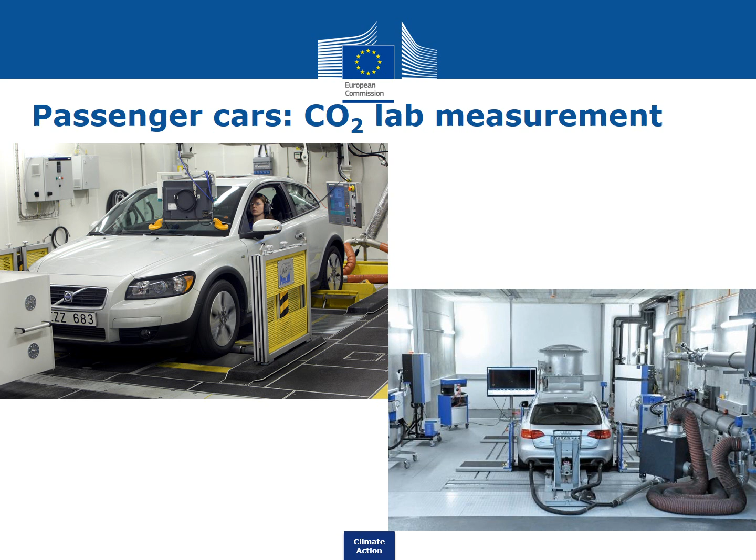And this is mainly because, for example, you can have a low, a medium, a high, a long, a short cab, or any other type of cab. You can also have 2, 3, 4, 5, or even 6 axles with different configurations like 4x2, 4x4, 6x2, etc. You can also have different tires for each axle, which means that you can have single tires or twin tires for each of these axles.

This is something very important. The same engine can be used on, let's say, different vehicles, and the same engine can be fitted also with different gearboxes or with different axles. So that means another configuration again. Then, the truck can be a rigid, can be a semi-trailer, can be a tractor, or if you are talking about buses, then this can be a coach, can be a bus, or can be even a city bus.

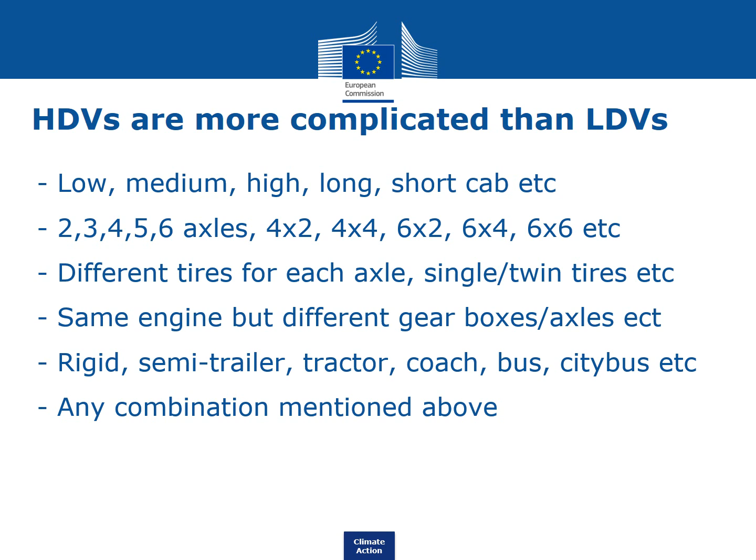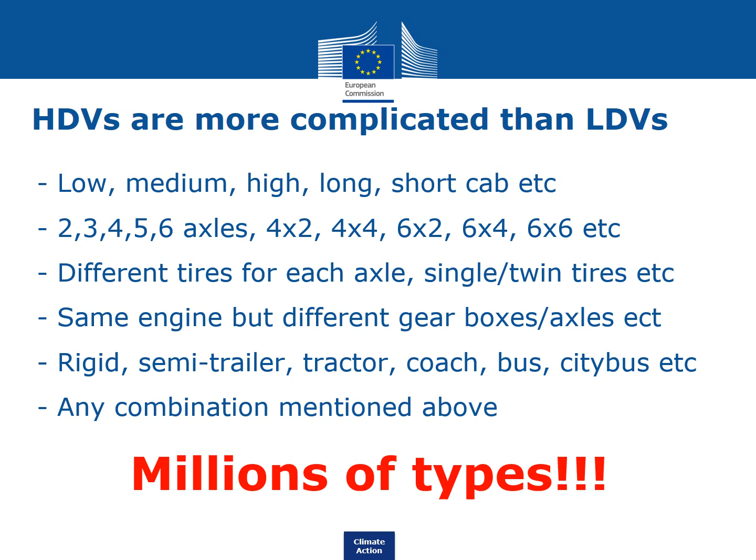And of course, you can have any of the combinations mentioned above. That means that at the end of the day, we might get millions of different combinations. So if you are talking about millions of different combinations, then you realize that it's almost impossible that we use any chassis dynamometer to test these HDVs.

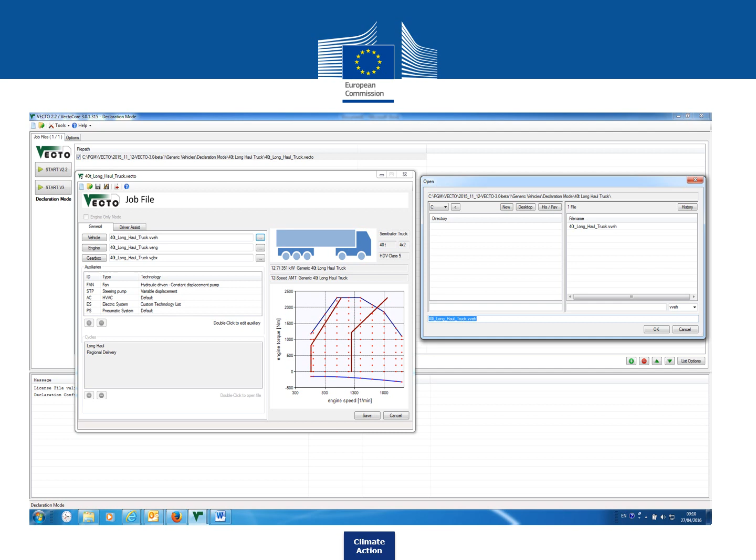This is the graphical user interface of VECTO. So this is just a snapshot of VECTO graphical user interface. And these are some more snapshots of VECTO. So you see, for example, here that we have a job file which is for the vehicle, and then we need to introduce details about the vehicle: number of axles, gross vehicle weight, and other parameters.

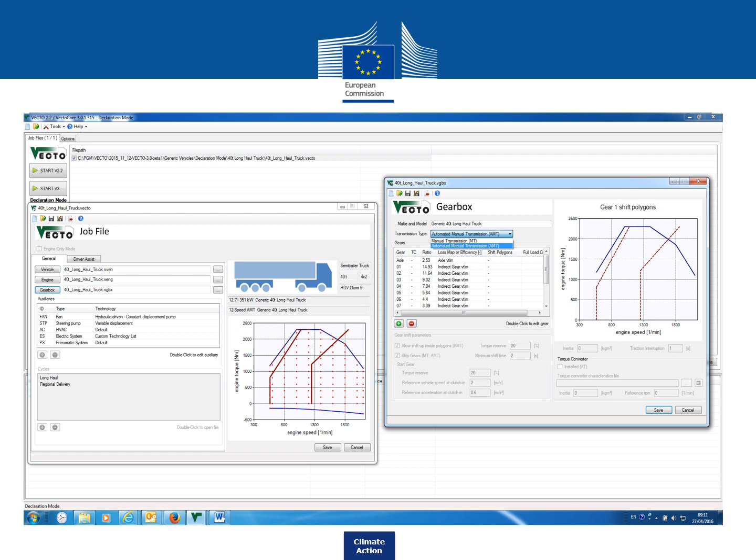We have something similar for the gearbox. So we need to introduce the number of gears. We need to introduce a couple of other information for the gearbox. And then we have also for the engine. So we need all this kind of data in order to run VECTO.

So VECTO now has got two modes, and this is very important. One mode is the declaration mode, where all generic data and the test cycle are allocated automatically as soon as the vehicle class is defined. And I will come back later to this vehicle class. And there is also the engineering mode, where the user can select and change all input data to allow recalculation of test data. Which means that if you are running a certain test, and you want to change something, then you need to use the engineering mode.

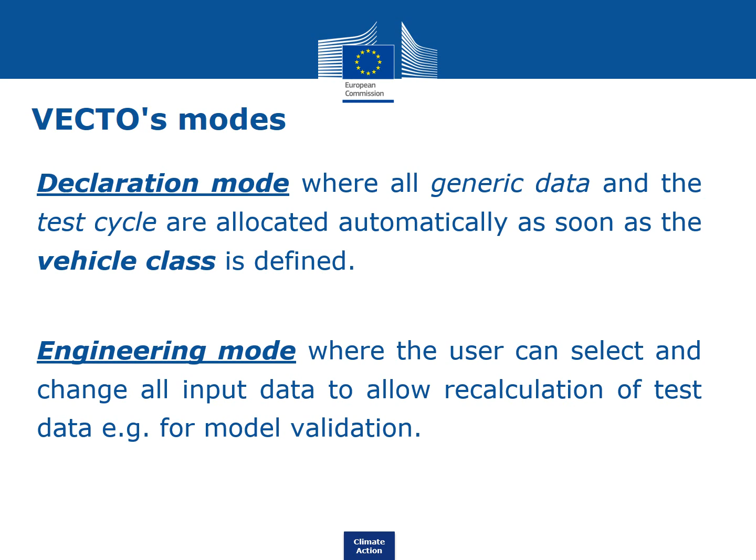But if you are running an official test and you want to get the certification, for example, or the certificate, then the declaration mode needs to be selected. In the declaration mode, you are not allowed to change a lot of things. But in the engineering mode, you can change a lot of things.

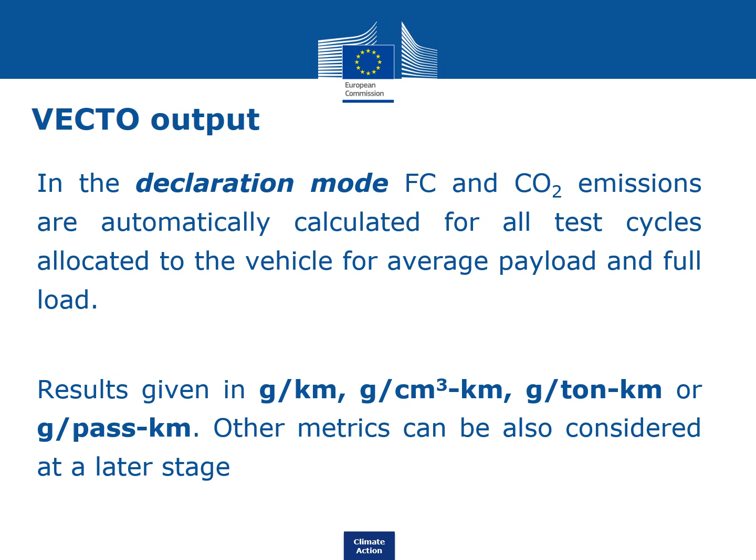And then, what is the VECTO output? So the VECTO output now, you see that in the declaration mode, the fuel consumption and CO2 emissions are automatically calculated for all test cycles allocated to the vehicle, for the average payload and full load. And the results are given in grams per kilometer, grams per cubic meter kilometer, grams per ton kilometer, or if you are talking about buses and coaches, grams per passenger kilometer. We are also considering other metrics that can be used at a later stage.

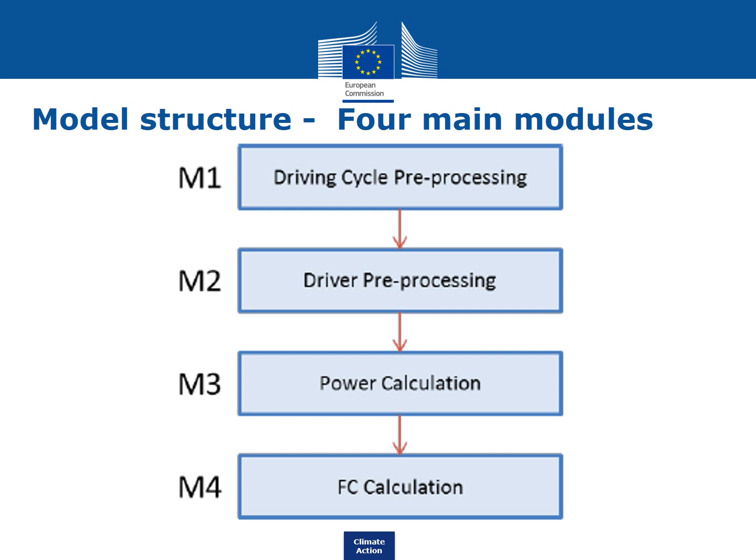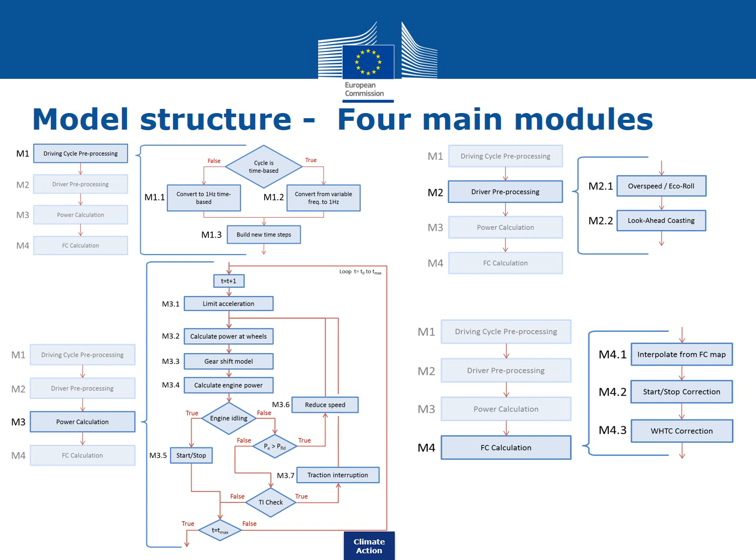A few details now with regards to the model structure. So we are talking about 4 main modules. So you see M1, M2, M3, M4. And these 4 different modules, I can tell you that they are very, very complicated. And there is a very complex structure in these 4 main modules. So you see, for example, that for each of these modules there are some sub-modules, and then each of these sub-modules can have sub-modules, etc. So you see here or even here. So it's really complicated, the structure of the tool.

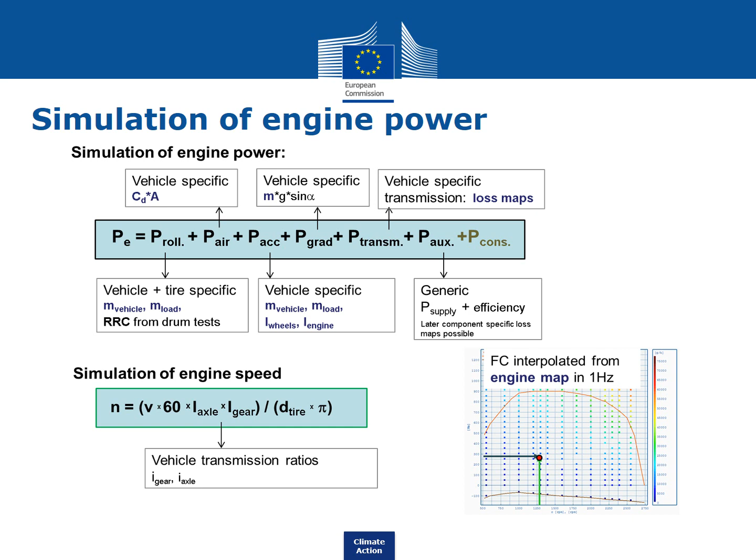In order to show you the complexity of the tool, have a look on this formula here now. So the simulation of the engine power comes from this equation here, from this formula. So this is only for the engine power. Of course, I'm not going to go through all these equations that are used in VECTO, but this is only to show you, as I said before, the complexity of the structure of the tool.

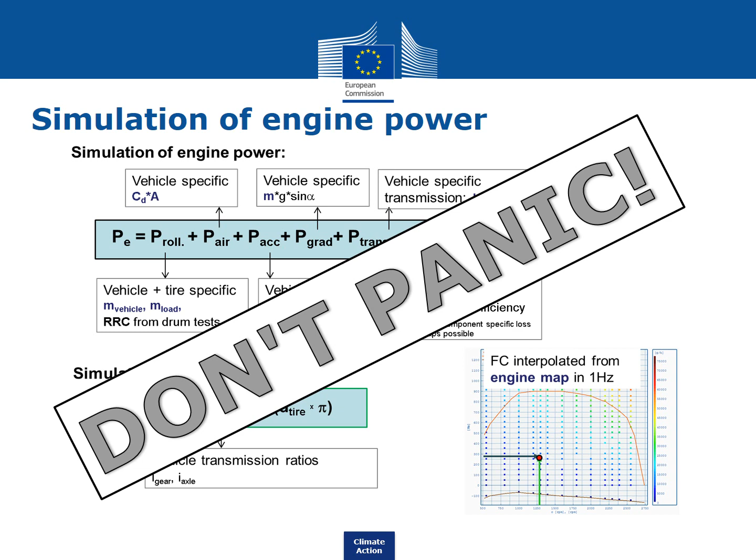I mentioned before 5 different mission profiles. So I would like to make clear now that I'm talking about 5 different mission profiles for trucks and 5 different mission profiles for buses and coaches. If you want to use another word instead of mission profile, then I would say driving cycle, but it's not exactly the same. That's why we use the mission profile here.

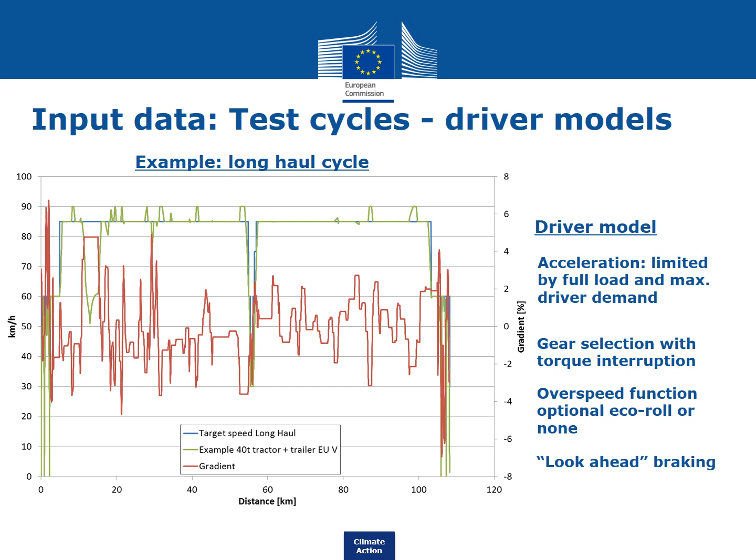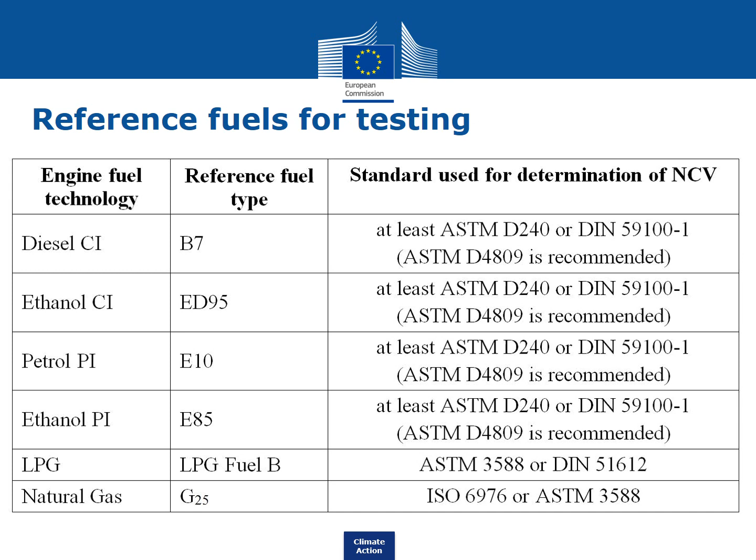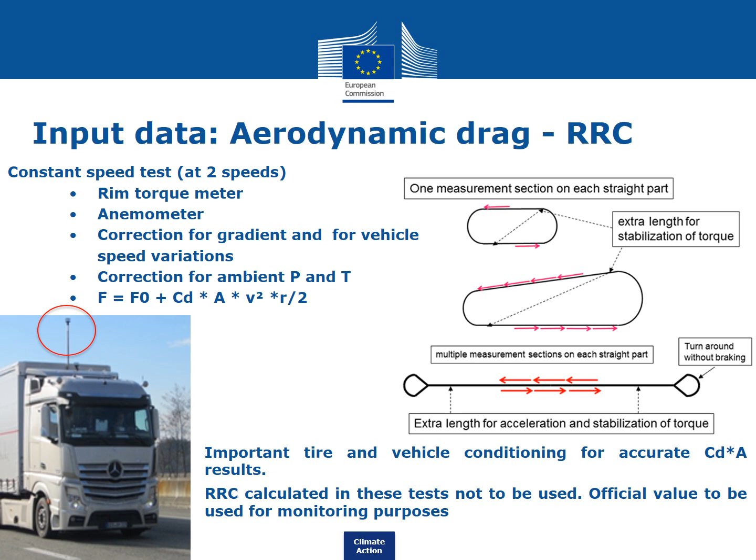What about the fuels now? What are the reference fuels for testing? So for VECTO, we are considering these 6 reference fuels, as we call them, and these are the 6 reference fuels that are already included in the Euro 6 regulation. So you see that we can calculate CO2 and fuel consumption from diesel, ethanol, LPG, natural gas. All these fuels are included now in the simulation specification for this test track. And then, of course, we need to apply certain formulas. We need to perform some calculations in order to end up with the aerodynamic drag.

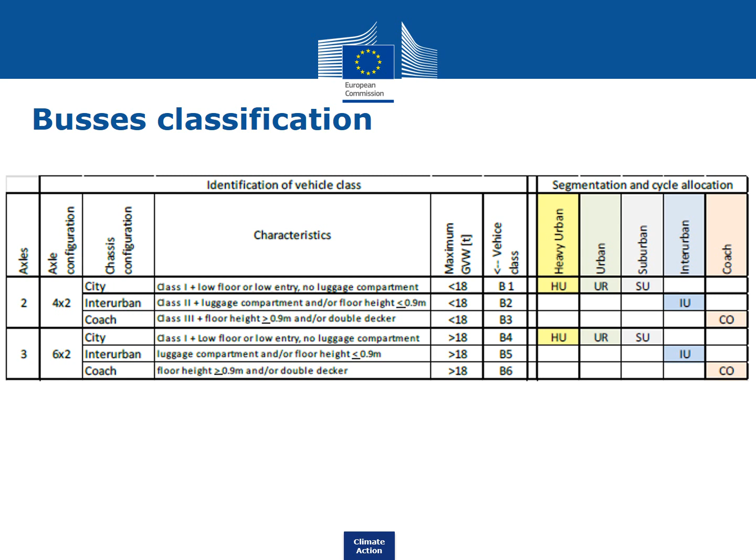These are now the 6 different classes for buses. So you see here, number of axles. So you can have a bus with 2 axles or with 3 axles. Then the bus can be 4x2 or 6x2. Again, the chassis configuration, and then the mission profiles that I mentioned before, heavy urban, etc.

Buses are not that easy to be simulated like trucks. Why? Simply because for buses we have a high share of energy consumption, which means that if you compare a Euro 5 semi-trailer 28 tons with a Euro 5 city bus, then you see that for the truck here, the auxiliaries losses, as we call them, is more or less 5%. And when I'm saying auxiliaries, I mean mainly the engine cooling fan, the alternator, the air compressor, the steering pump, and of course the air conditioning compressor.

If you move now to the Euro 5 city bus, which means a bus which runs in Beijing city center, for example, then the auxiliaries losses here can be 26%. So from 5% for a truck, this can be 26%. Why? Simply because you get more losses for certain auxiliaries that are used on buses and coaches.

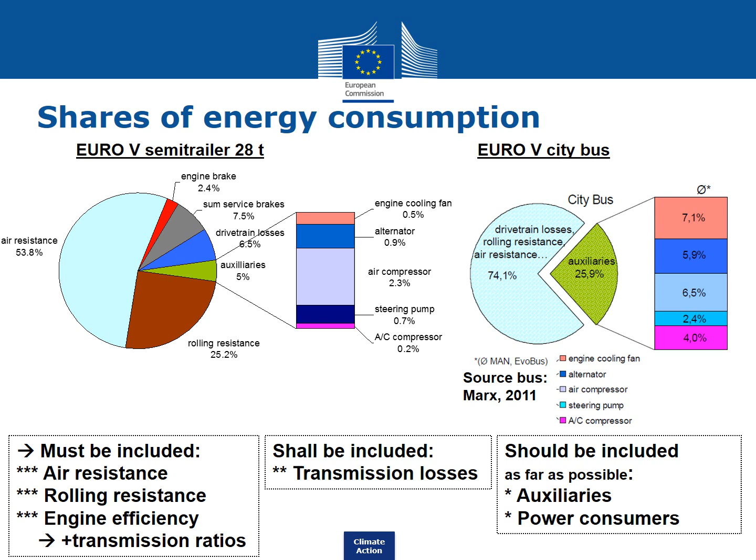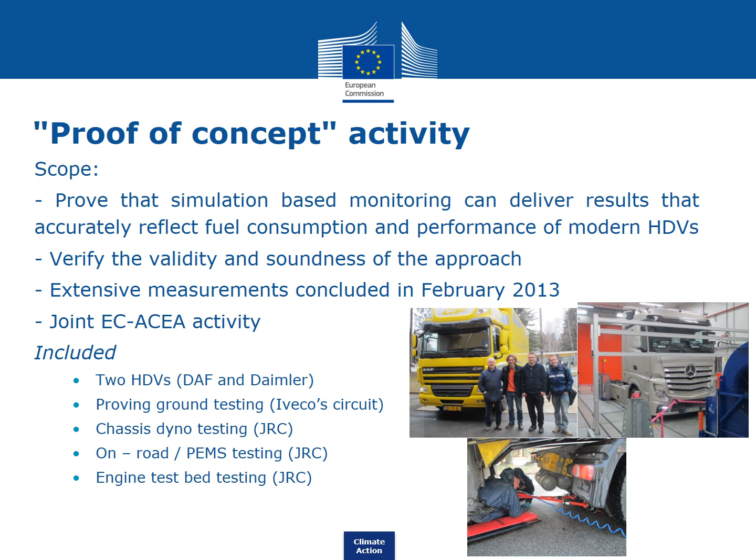My colleagues at the JRC, which is the Joint Research Center of the European Commission in Italy, performed tests with two trucks, one Daimler and one DAF. We used the proving ground test of Iveco. Then we had also the JRC dyno testing, and then we had also some PEMS equipment in order to check the on-road emissions. This is very quickly the equipment used for these tests.

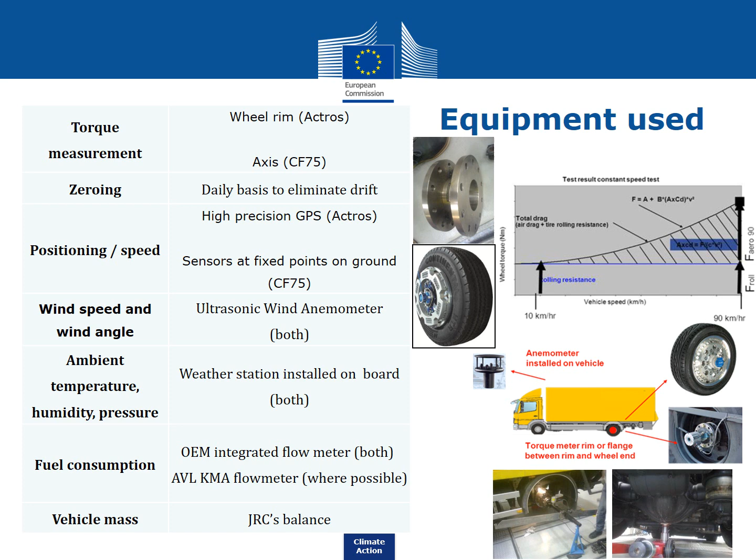And then you see here, for example, the torque meters that have been used in order to calculate and get certain information from the vehicle. These are the test vehicles that we used. As I said, it's a Daimler, a tractor with a semi-trailer, and this is a DAF, a rigid one, 2 axles. The Daimler is a Euro 6 vehicle, and the DAF one was a Euro 5.

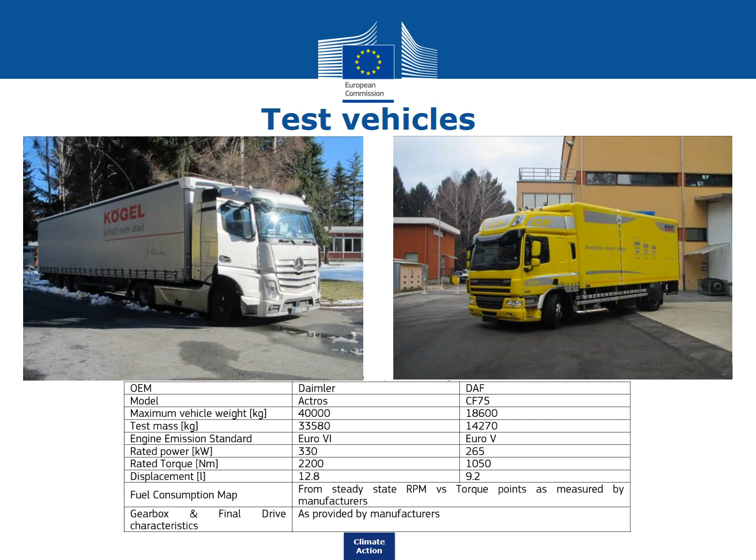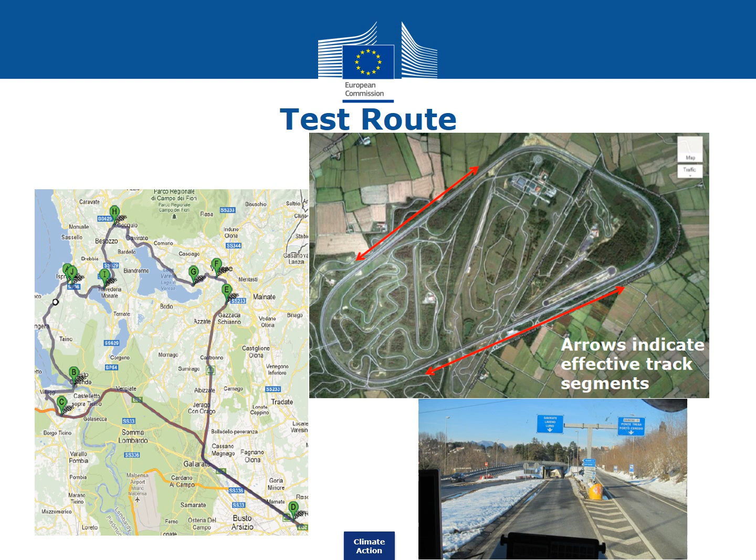This is the test route. So this is the test ground at Iveco in Italy that we used in order to make all the aerodynamic tests. And this is the route that we followed under real-world conditions. So this is the distance traveled, in order to calculate all these fuel consumption and CO2 emissions.

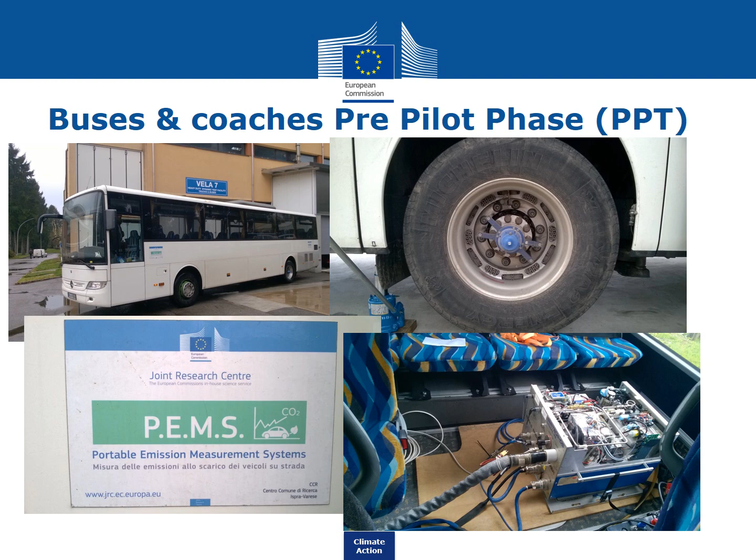We performed a similar activity for buses and coaches, and we call it pre-pilot phase. And I participated in this pre-pilot phase almost a month ago. So you see now that we had a suburban bus there. And these are the wheel rims that we used also on this bus. And this is the PEMS equipment. The whole vehicle was fitted with this PEMS equipment. And we used also JRC's test facilities in order to check the vehicle. We put the vehicle on a chassis dynamometer and we measured the vehicle.

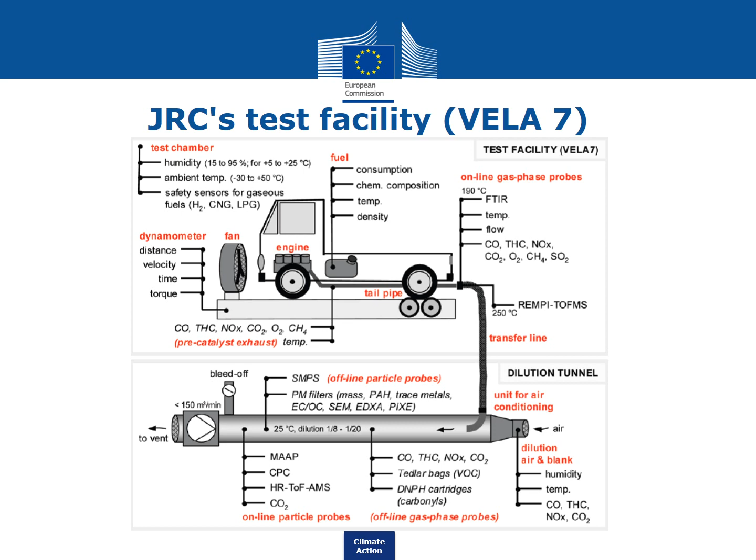What are now the report's conclusion and the follow-up? We concluded from the proof of concept activity, and this is the most important for us, that the simulated fuel consumption was calculated within a range of plus minus 3% from the real world measurement, or even less, which means that the accuracy of our simulation tool is more or less plus minus 3%, and I think this is very, very important and is something that we are very proud of. The full report of this study, if you would like to get some more information, can be found on our website. So you can easily download the full report that we published.

And then I'm just at the end of my presentation, and I would like to give you some information with regards to the timeline. I'm talking about the timeline for trucks only, because for buses we are supposed to be 1.5 or even 2 years late. With regards to trucks, VECTO development is still ongoing, and I think this will be ongoing in the future as well. Dissemination and trials, as I said, we started back in 2013, and we performed all these trials until mid-2016. Preparation of possible legislative proposals, as I said, it has been voted only last week. We started in 2015, and the Technical Committee on Motor Vehicles has adopted now this legislative proposal.